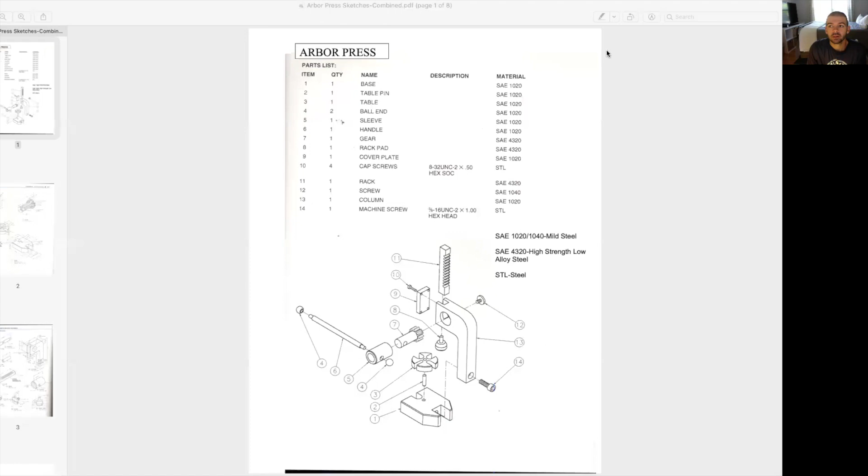We're talking about this gear because you guys have seemed to have a lot of questions about it. So before we get too far into it, I want to go over how to look at these dimensions. There is a lot up in this region here, and I get that. And for a lot of you, we didn't get too far into things, so this is probably a shock to the system seeing all this stuff here.

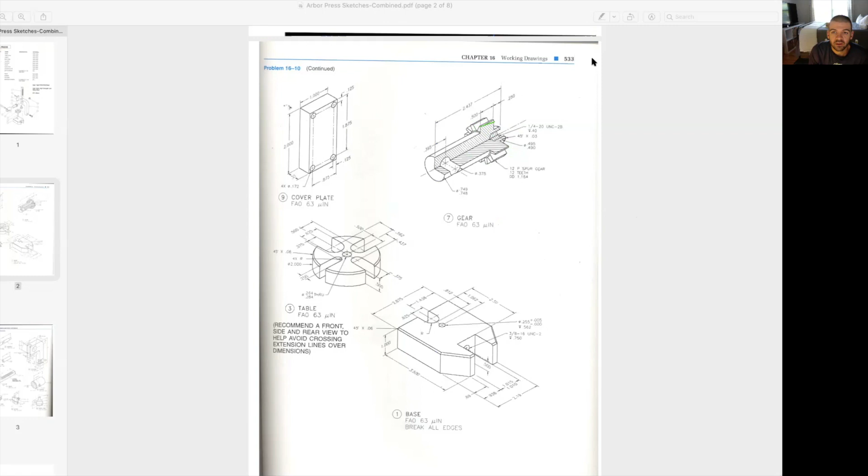We're gonna add the gear face, and how we're gonna do that is we'll use some of the information here, like this 0.5 and this 0.25. That'll set our length of the gear itself there. And then we're going to go to our supplemental drawing here, and we are able to see the distances of how wide this thing is, and then how tall off of the shape that it is.

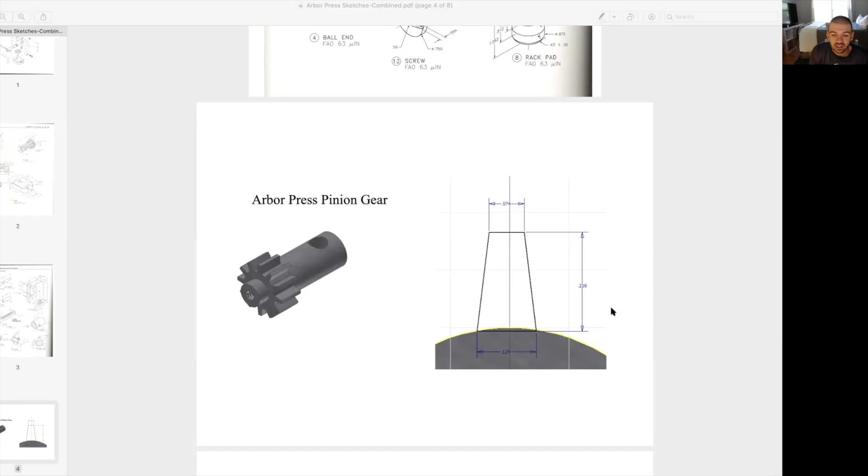Now, it's not an exact science right here. We'll try to get it as close as possible, but this drawing kind of leaves a little bit up to interpretation. What you could do is the outer diameter here is 1.164. So what that tells me is from the center here up to the top of my shape is going to be half of that 1.164.

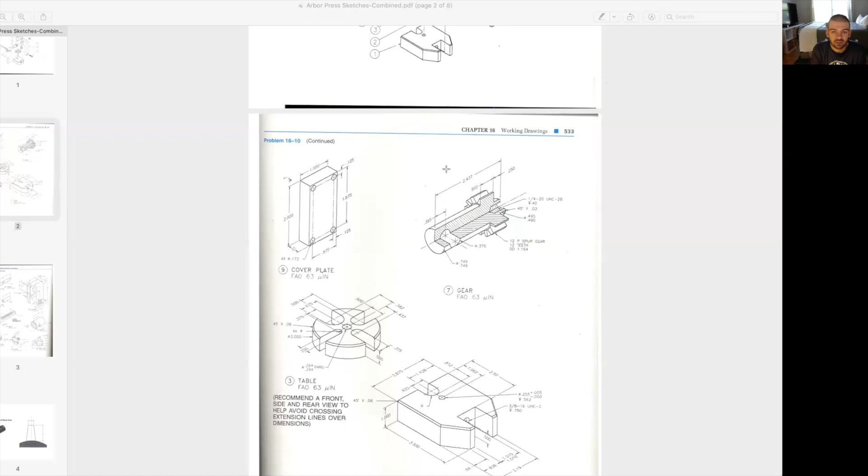So why don't we start drawing? I have these printed off for myself, so I'm not gonna refer back to this drawing anymore. And hopefully you guys have these drawings either printed or available so you can see it as well. All right, here we go. So this is the Fusion 360 window, and for people that are on Onshape, it should work exactly the same, except for the threaded top at the end. But you can still create a hole, you just won't thread it.

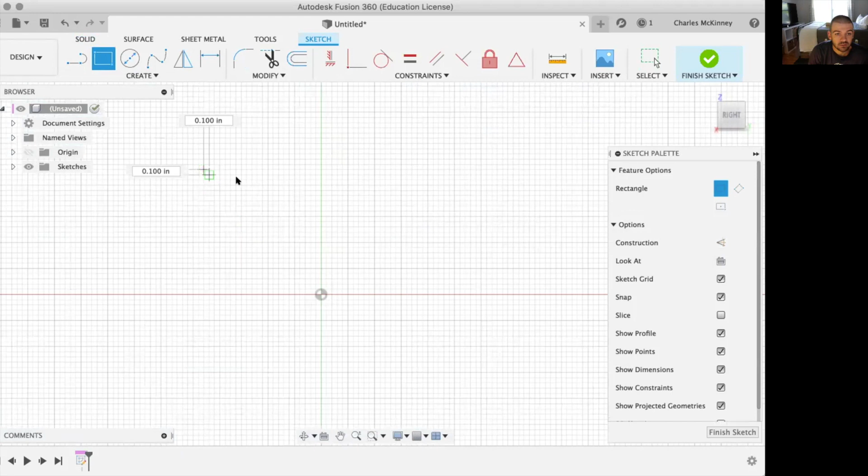Start the sketch, nice and simple. I'm just gonna create a rectangle, and then I'm gonna go back in and start adding my dimensions. Now, I've had one person ask me, how do I do a closed shape or a closed profile, and then 3D fill it in? It's simple. It's just this shape. There are no open corners on it, and then it will fill for a 3D shape. Okay, so I'm going to dimension this line.

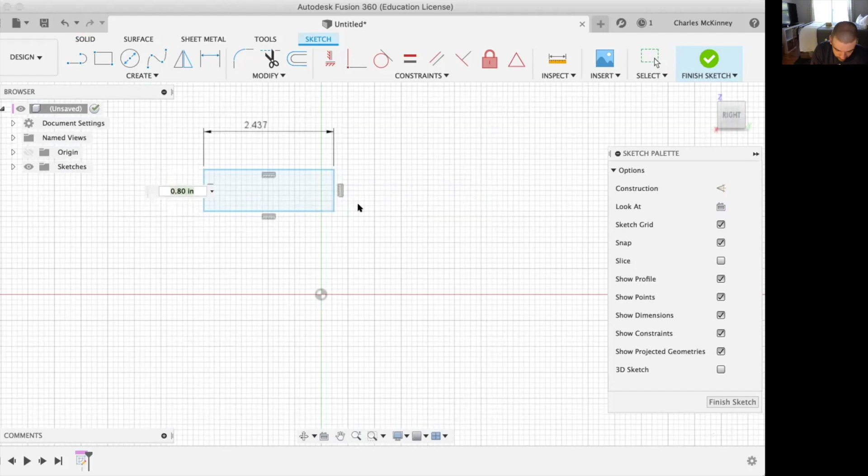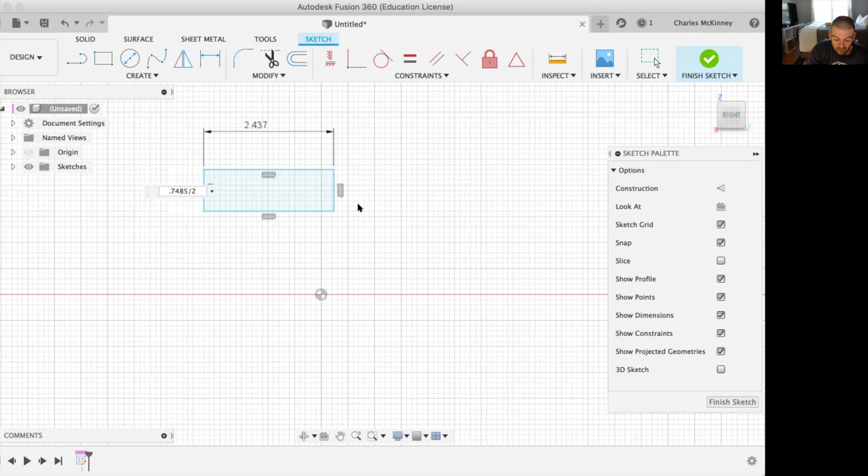And then I will find my diameter of the circle on the left side of that shape. I'll just take the number in the middle of those two, so it's 0.749 and 0.748, and I'm going to say 0.7485. And then I will divide that by 2, because remember, we're only going from the center line, so we're only using the radius.

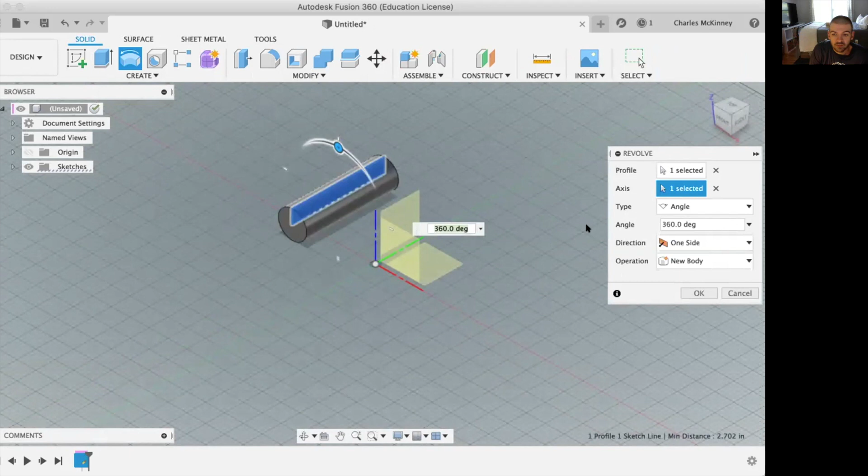And from there, we can actually revolve this thing. So I'm going to cancel out my dimension. I'm going to finish the sketch. I'm going to come over here and revolve this shape, and I'm doing it 360 degrees. Done. All right, so that's set up. I'm good to go there.

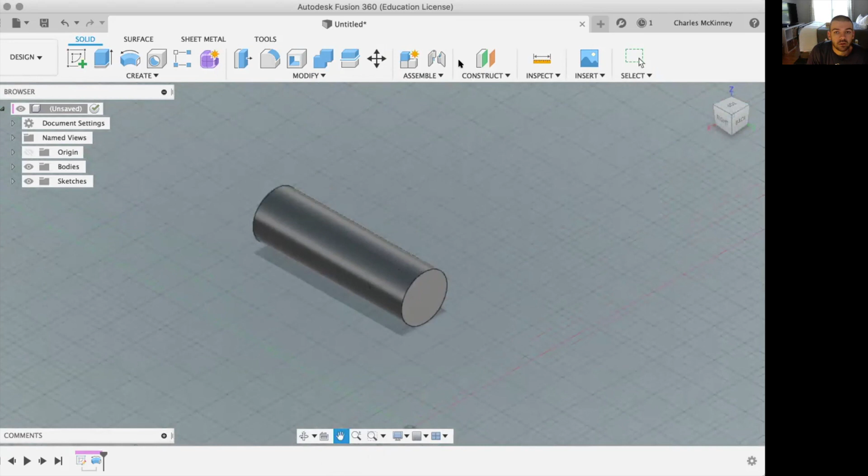Now, what I need to do is use an offset plane from the top. That's going to allow me to draw the gear from the bottom of the gear head. Okay. I'm not using my normal mouse. So we're going to do an offset plane from this top face, and we're going to go back to the bottom of that gear. So we're going to go minus 0.5, and that'll set me up right there, and I'm going to select OK.

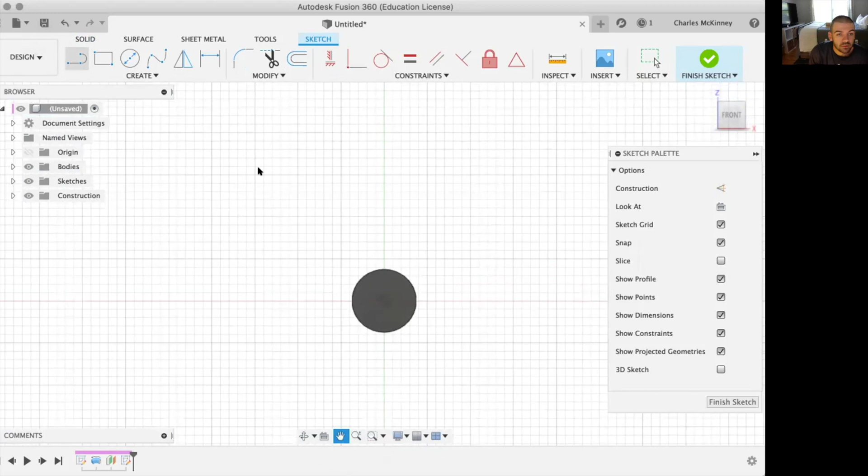Then I want to sketch on that face, but I want to turn around and go from this side. And so now I'm sketching the shape of the gear. So I'm going to look over at my other drawing here, and then I'm going to firstly draw a center. All right, you know what? Doesn't matter.

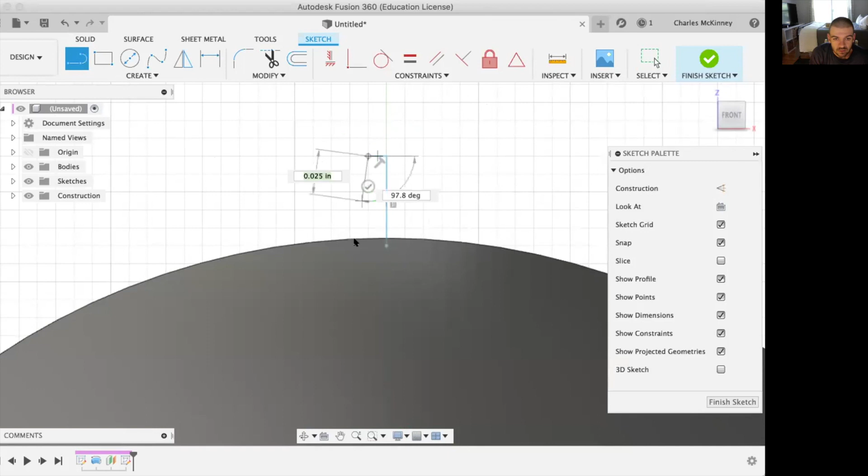So I'm drawing that, and then I'm going to draw a line out and down. No, it doesn't. And then instead of doing anything else to that, I'm going to mirror that shape over. So my mirror tool is here. I'm going to select my lines that I want to mirror over, and then select my mirror line next, and

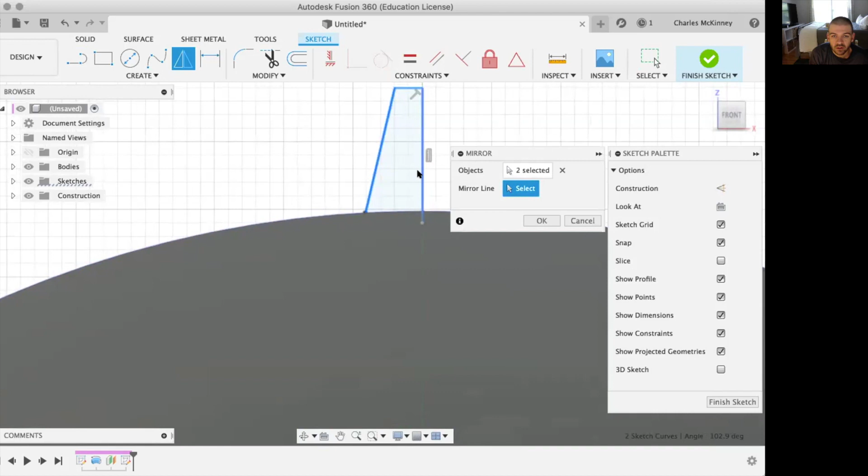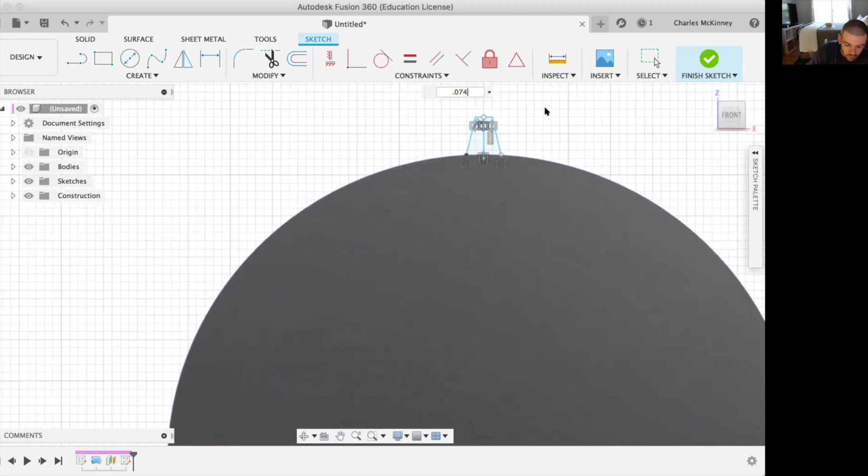OK. And then I'm going to add some dimensions. So let's hide that. My top dimension from this point to that point is supposed to be, wow, 0.074. And then my bottom dimension from that line to that line is supposed to be 0.125. And then if you notice, our height is wrong.

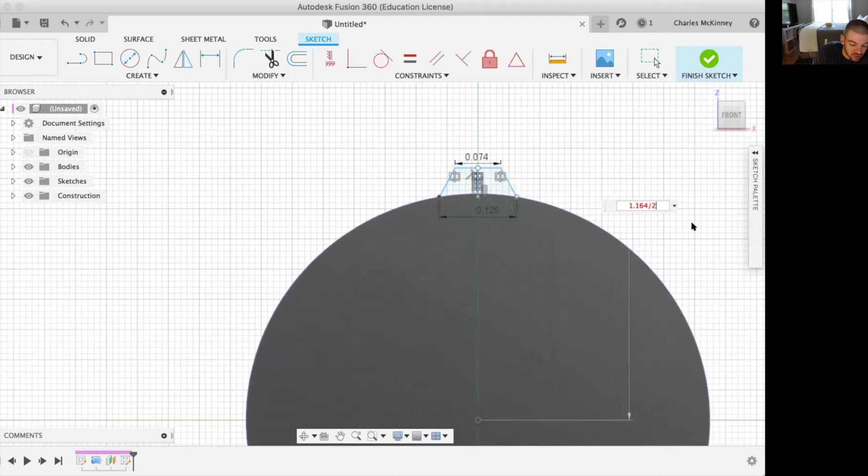So what we're going to do here is what I was talking about at the beginning, where I'm going to go from the center point to the top of this line, and I'm going to use that outside diameter. No. So the outside diameter says 1.164. I'm going to put 1.164 and divide that by 2. And that should give me the height of that shape.

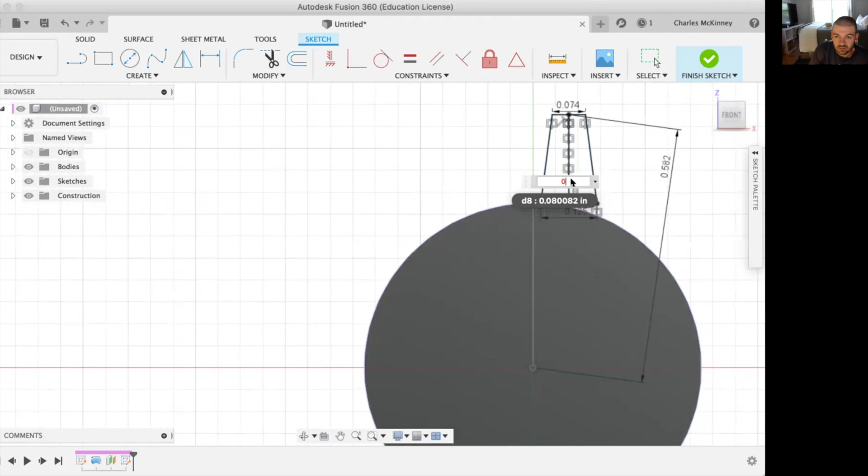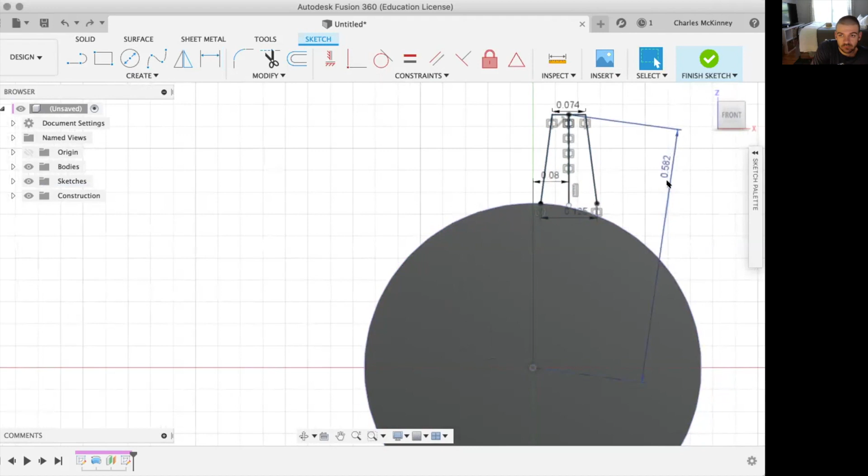Now what it didn't do was stick in the middle. So I'll just go back and add a measurement from, you see how it pulls a few different ways? Pull it straight up and add this measurement in there, just 0. And that should center the line back up, or not. Let's do this.

Okay, so now I want to add the measurement from the first part of the sketch, which is the outside diameter. This is where I'm going to go from the middle to the top line here. But what I noticed when I did it the first time was that it moved my center line here. And I don't want that to happen. So I'm going to use this constraint. This is fix or lock. So I'm going to lock that center point into place so that cannot move when I add this dimension.

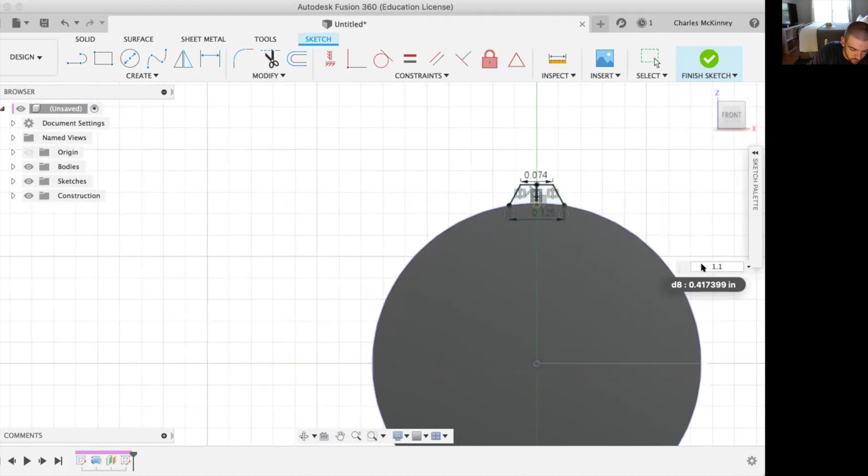Then I'm going to go from the top line to that line, and I'm going to add 1.164 divided by 2, because remember, we're using the radius here. And there we go. That looks a lot better. Okay, so there you finish your sketch. Should rotate me around sideways. It did not. Let's do it ourselves.

Okay, so what I'm going to do here is I'm going to extrude this. There you got to select both, apparently, because that line is splitting it. If you made it a construction line, it would have been easier, but it doesn't really matter too much. So from there we need to back up.

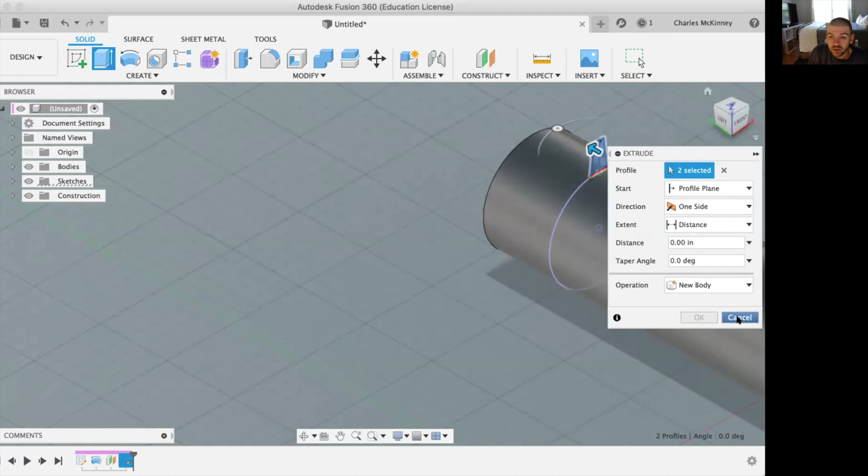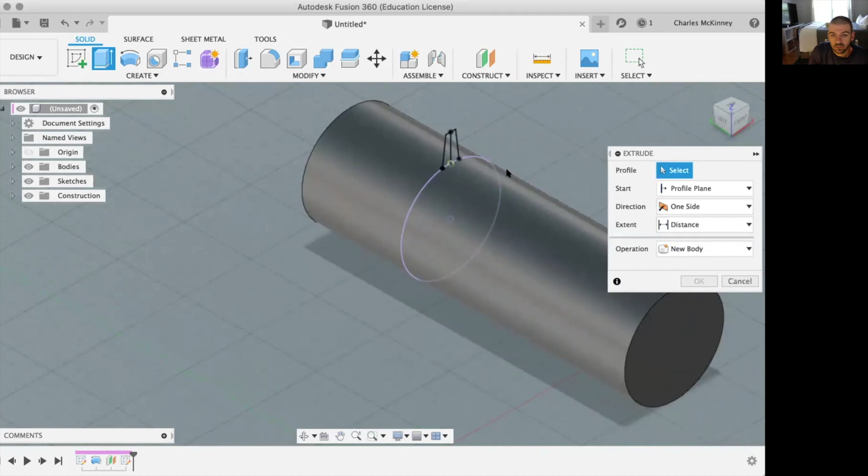We need to go back to sketch 2. I'm sorry, not sketch 2. We need to go back to the offset plane, and we need to change this to 0.75 actually. I missed that 0.25 that was in there because we are extruding this 0.5. This and that, 0.5, and enter. Okay, so there's that.

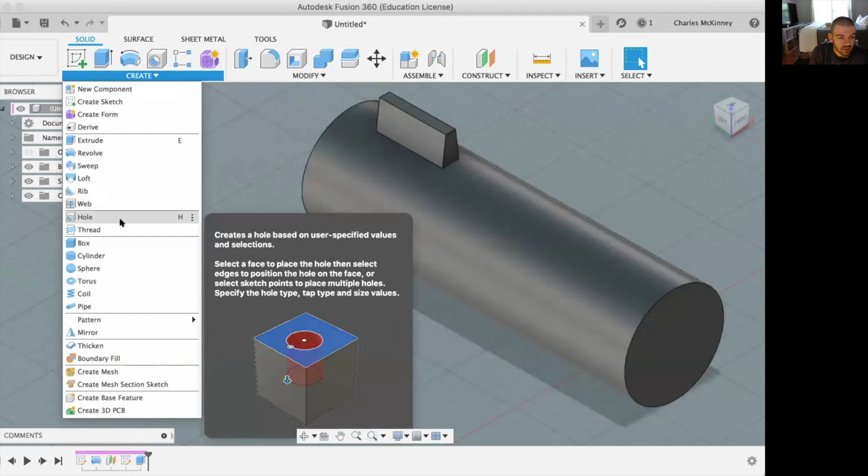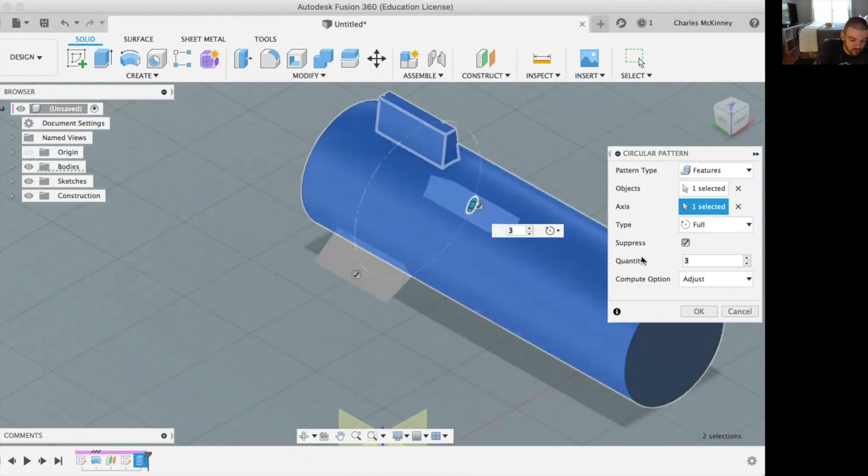And then what you do with that is circular pattern, which is, that's a rectangular pattern. Go under create, there'll be a pattern and circular pattern. And we're gonna select that feature, not faces, we wanna go features. So I'm gonna select this feature here and select this axis here. And then quantity, there are 12 of them. So add in the number 12 and okay. And there I have the teeth on my gear.

So next step is to add the chamfer. So I'm gonna go here to modify. I'm gonna find my chamfer tool. I'm gonna rotate this around so I can see the top. And I'm doing distance and angle chamfer because of my numbers on the sheet. Remember the 45 degrees by 0.03.

So all I do, I just select the edge that I need. I'm adding my distance here, 0.03. And then my angle is already placed in there. And select OK. That's easy. Next step is to add the screw hole on the top. So I'm just going to create a hole on top.

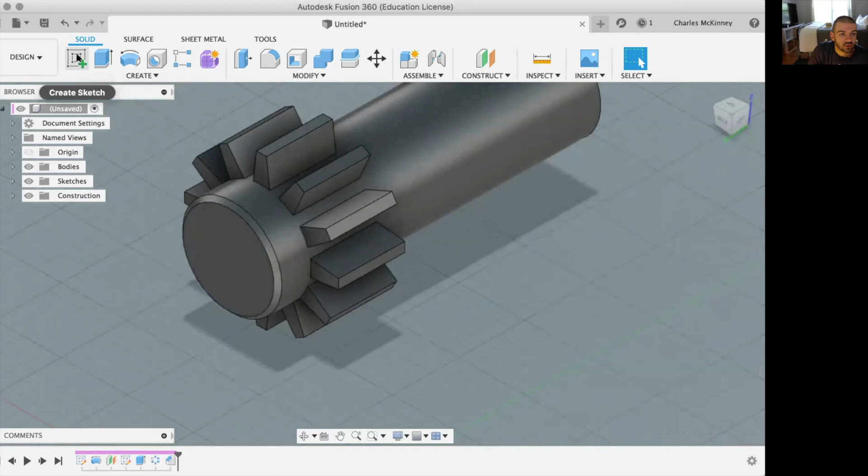Before I do that, let me add a center point. So sketch on this, create and add a point right in the middle, and then finish sketch, and then I'll come back and add my hole. These are little things that you guys need to pay attention to because they do make your lives easier. If you do these little tiny steps like adding a point or figuring out the distance and angle chamfer, they're like minor details that make a big difference.

Okay, so we are going to do a drill point hole. It's going to be threaded, so we're going to choose tapped, and then let's see what else. It's going to be a 1/4 inch 20 UNC, so we're going to change this to 0.25, and that'll change this to 1/4 inch 20 UNC. It is a 2B class hole, and then the depth is all we need to change here. So it's going down 0.4. Actually, it's already 0.4, so we're good there.

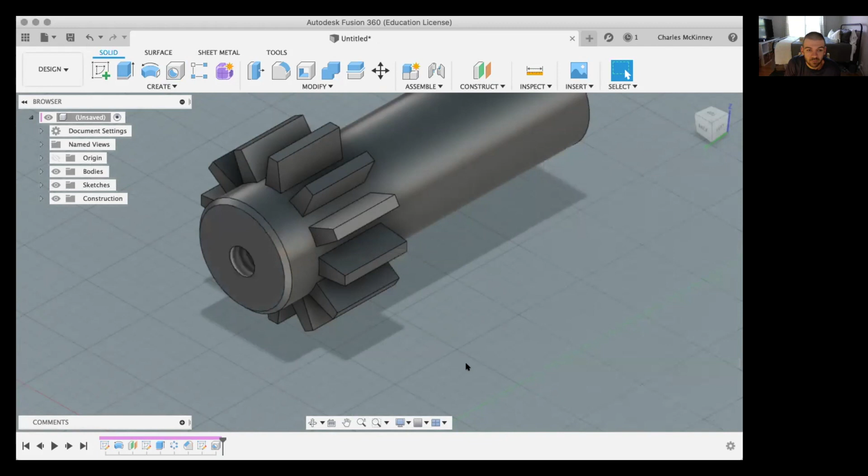And that's it. Everything was just a simple hole, threaded, drill point, distance down. There's no specification on the angle for the drill point, that's standard. And then just update all those and click OK. So now I have that into place. And what I need to do lastly is add this hole at the bottom of my shape. So I'm going to set up a tangent to plane. I'm going to select that plane and select OK. Then I'm going to sketch on this plane.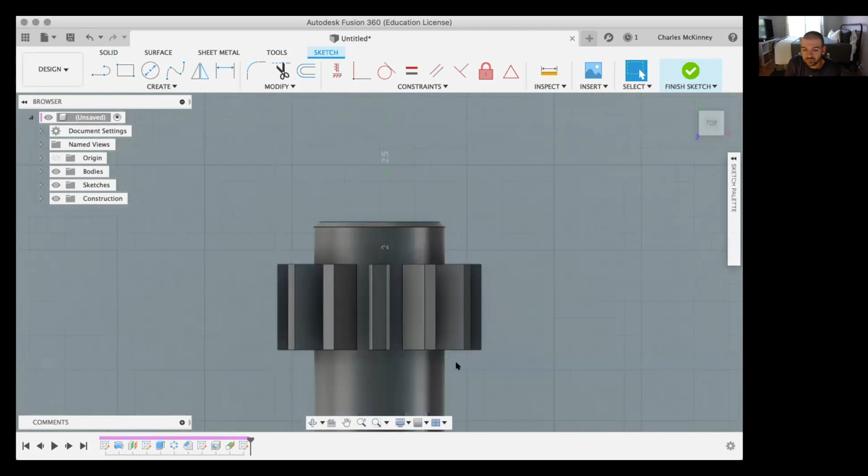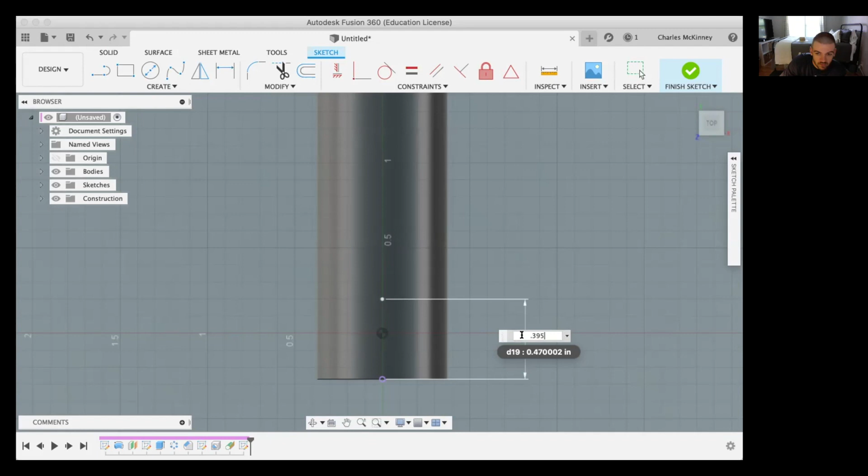Come down here. I need to add another point there. And then I'm going to dimension the distance the point is off of the bottom. And the distance that I have shown here is 0.395. There. Once that's in there, finish the sketch.

We're going to add a hole. You can see, add the hole. This one's just a simple hole. Click on that. We have no drill point this time, and it is going all the way through. Let's see, so you just change it to all.

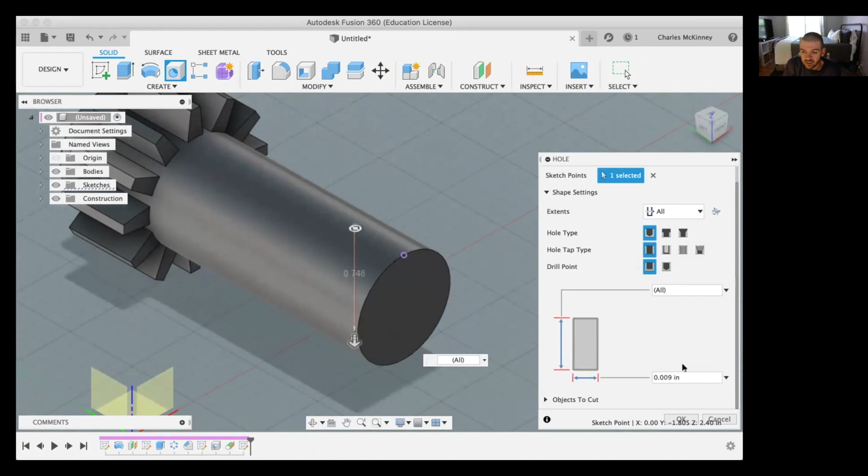And I need to update my diameter here. So it's not 0.009, it's 0.375. Enter, and there you go.

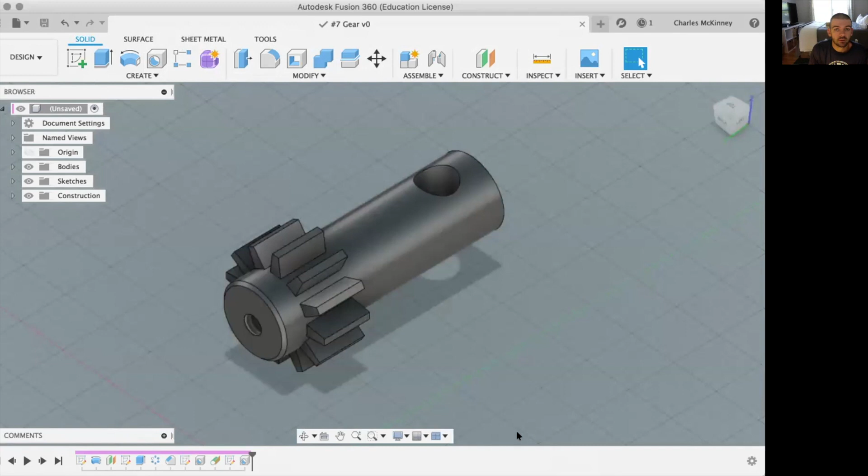This is just some saving things. So create a new project, name it the gear. All right, so I can close that.

I was going to do more videos for you guys, but I don't necessarily think that I need to. I believe that you guys can create the rest of these things on your own, because the most questions I've had were on the gear itself. But I will go through a little bit and annotate just so you guys know what's going on.

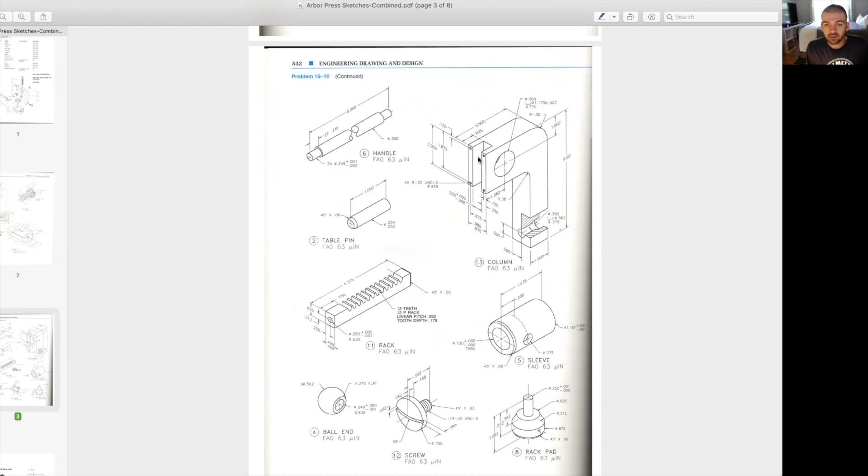This simple column here, I would do an overall rectangle. That's a terrible rectangle, but then you would just go back in and cut this out, so you wouldn't need that shape in there. And then you're adding a hole here, you're adding a hole here, you're going to cut out this shape too, and then just fillet that back edge. So that's the overall drawing, and then you've got hole notes.

These are just the same as your drill block. It's nothing special there, just drill block holes. Even this is just a counterbore hole. The plus or minus are tolerances. This hole down here, counterbore as well. If you guys don't get those 100% accurate, it's not going to hurt my feelings, and it won't hurt your grade either. So just do your best on that.

I know that you will have some questions, but at this point, I just want to get it done, and I'm pretty sure you guys probably feel the same way.

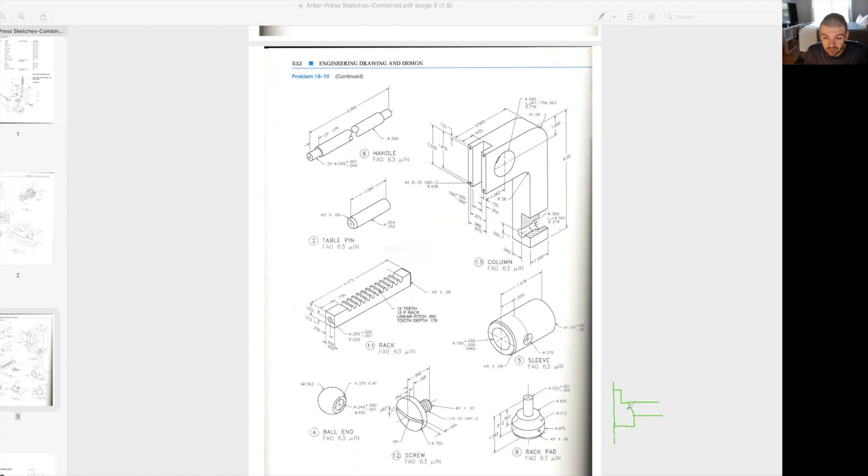So the next one down was the rack pad. You're basically going to create a half shape here, and then just revolve it. If you set up the distance between this line and this line, and their distance this way and this way, what that's going to do is complete the angle for you. So you can just go back in and draw that angle lastly.

So you have a line here, and you would have a line here. And then the end point of this and the end point of this would connect and form an angle. And that's how you would get this rounded curve here. And then this bottom note right there, chamfer. Anytime you see a degree next to a distance, it's going to be a chamfer.

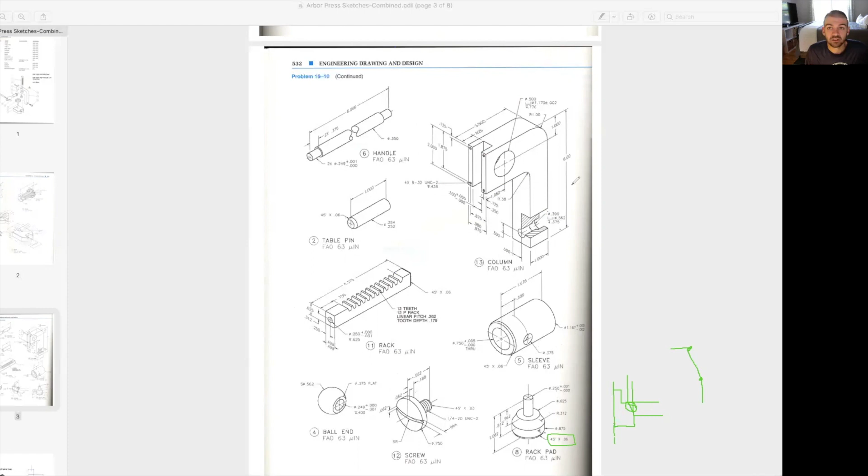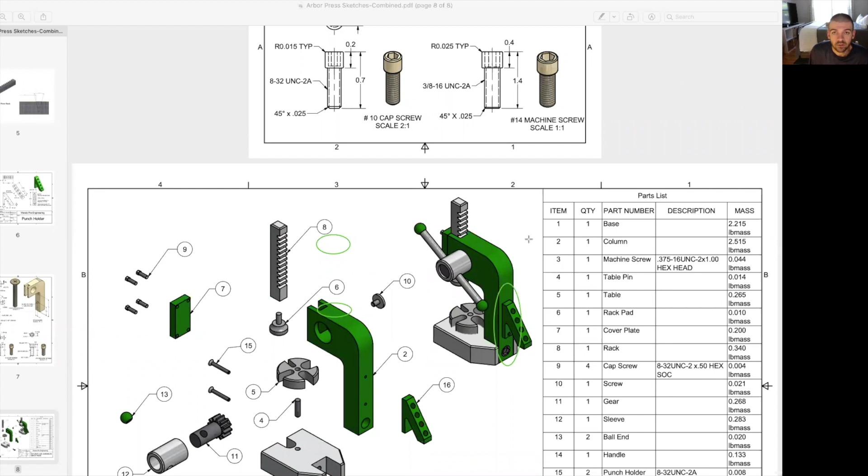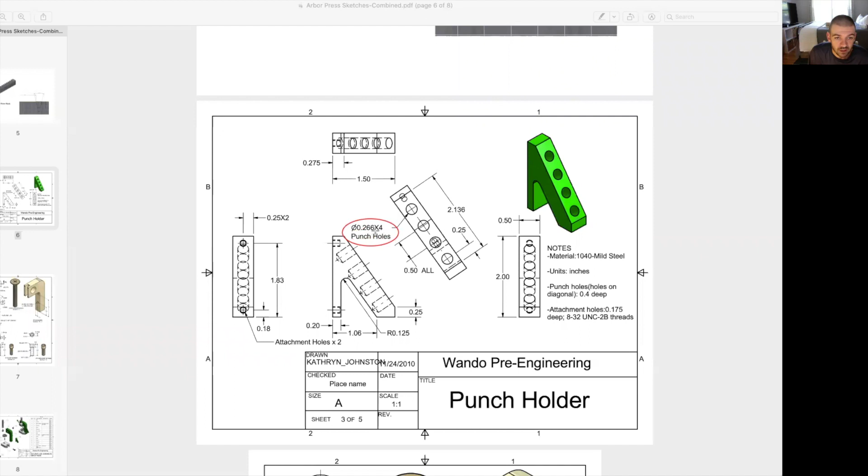And then the other thing that you need to pay attention to on this is the size of your holes. The size of those holes matters; you just want to make sure that they all fit. So the punch hole size is right here. The ×4 just means there's 4 of them, 1, 2, 3, 4, and they're 0.5 difference between each.

These measurements give you your overall width, so they show you the direction here, and then your direction there. Obviously this right here is showing you your distances that way and that way. And then this number here is showing you your inside right there. So you just got to kind of combine a few things here.

These are showing you your holes on the back side. The distance there and there are your backside holes. And then the size, the attachment holes ×2. They don't show you a measurement for that, I believe. Yeah, they do, actually. It's right here. That note goes with these holes here.

All right, so that should help out a little bit. And punch hole depth is right here.